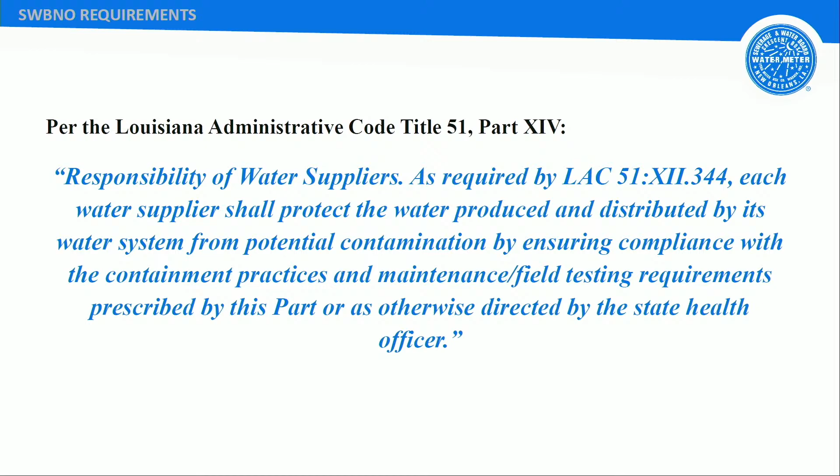So the first section of the proposed revisions will cover our definitions. There are 51 total definitions listed in this section, and a little over 30 of them are specific to cross-connection control. I wanted to clarify for you guys here, cross-connection control and backflow prevention are fairly synonymous for this presentation. Cross-connection is more of a symptom, meanwhile backflow prevention is the solution to that symptom. So if that's confusing in any way, let me know.

Any other terms that are not listed in this part shall exclusively be adapted from the International Plumbing Code, IPC 2021.

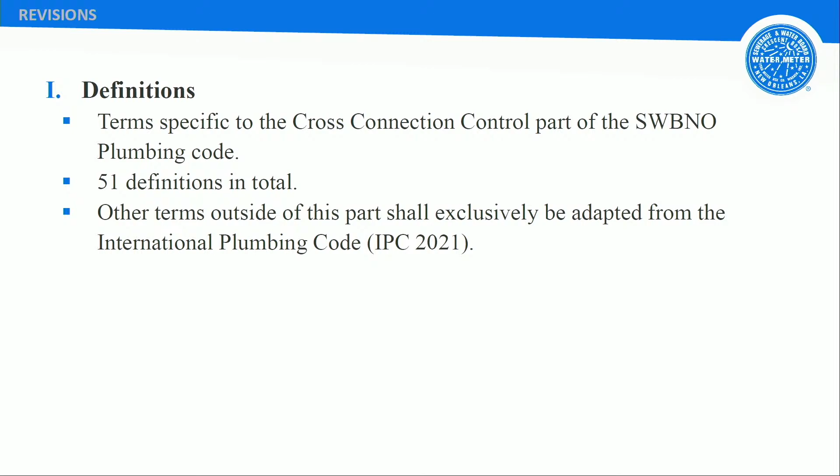In order to administer this program in an effective manner, the Sewage and Water Board will retain the right to implement specific processes for the purpose of due diligence. We, as the water purveyor, will require access to customers' properties to be able to survey for potential hazards. Any individual who wishes to perform work related to backflow prevention in our parish will need to go through an approved training program, and these training programs are approved by the State Plumbing Board of Louisiana, so that is something that they handle.

They will also need to register with the Sewage and Water Board's Plumbing Board, and they will need to register with the backflow section. And here is one of our more important bullet points: we will need the authorization to terminate water service if deemed necessary to protect the Sewage and Water Board's water supply from potential or actual cross-connection hazards.

This is a requirement that was outlined by the Louisiana Department of Health when we had our meeting with them, and it is also listed in that Louisiana Administrative Code. And for us that are new to this program, if you could define or explain in a little bit of detail cross-connection versus backflow prevention, those two concepts.

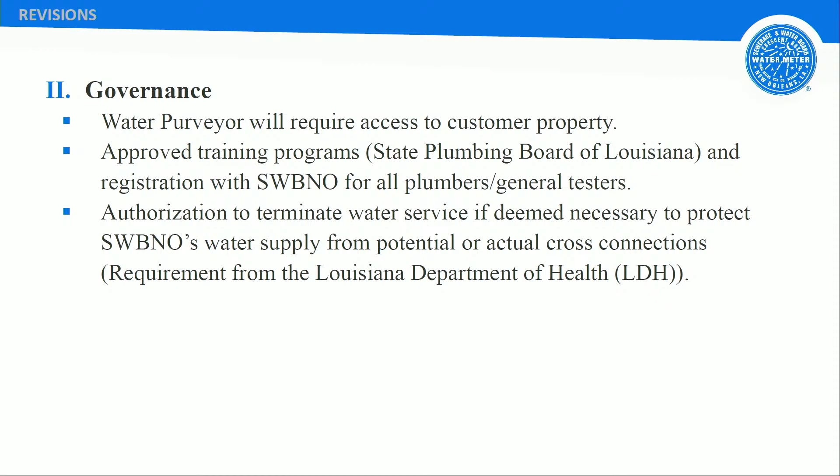Any questions on that? No, thank you. Thank you. All right. So, much like I said earlier, the authorization to terminate water service if we find a hazard that is dangerous enough to public health is vital for this program. We need to be able to protect ourselves and our constituents if we find something that's going to have a very, very negative effect on people's health.

So next, we're going to talk a little bit about responsibilities for all parties. We're going to start with the customer's responsibilities. The customer shall be responsible for the elimination and/or protection of all cross-connections on his premises.

So much like I spoke about a little earlier, what can those examples be? It can be an irrigation system with in-ground sprinklers for someone's lawn. It can be a pool that has an autofill device directly connected to the drinkable water supply. It can be a commercial building that has a fire system. It can also be a commercial or industrial building that does meat processing or any kind of chemical activities. There are quite a few different types of hazards that we need to be protecting against.

The customer shall, at the customer's own expense, cause installation, operation, repair, testing, and maintenance of backflow prevention assemblies as required by the administrative authority. The Sewage and Water Board is the administrative authority and the water purveyor, just to clarify.

This part, the customer's own expense, is also clearly outlined in the Louisiana Administrative Code. So this should not be anything that people have questions about because it's already in the state code, it's in our sanitary code. If you own the device, if you have a cross-connection on your premises, you own a device, take care of it. It is your responsibility to make sure that it works, to keep it up, or to install it if you have that cross-connection on your premises.

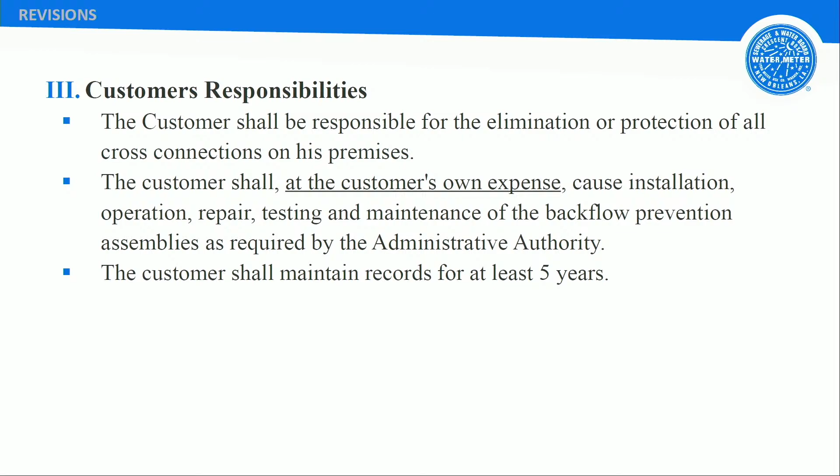How do people know about it? We send out letters, notices saying, hey, you have to have your assembly tested. It's been a year, you need to get your annual test together. Thank you.

Moving on to the plumber's responsibilities. As mentioned previously, to be authorized to do work in Orleans Parish, you need plumbers and general testers. A plumber is somebody that has either a master plumber license or a journeyman license. They are a professional within that branch. A general tester is somebody that has gone through a 40-hour general testing class, backflow testing class. They are only authorized to do testing. They cannot install, they cannot repair, they cannot do anything except test that assembly. So that's your difference there.

These plumbers and testers will need to register with the Sewage and Water Board's plumbing department, as well as the backflow section. So they will come down to the plumbing department and get their authorization to do work in Orleans Parish. And then they will usually send me an email and say, hey, I would like to start doing backflow testing or backflow work in Orleans Parish.

They have to get signed up with our software. With our software, they upload their state plumbing license, their WSPS, which is Water Supply Protection Specialist endorsement. If they're general testers, they will upload their backflow certification. All of those have due dates on them, and so we will put those in our system. The system keeps track of the due dates, and they will also upload their liability insurance. We keep track of that due date again. So if you are in my program and you are on the approved plumbers list, you are up to date on all of your credentials, you have your liability insurance, and you are authorized to do work in Orleans Parish.

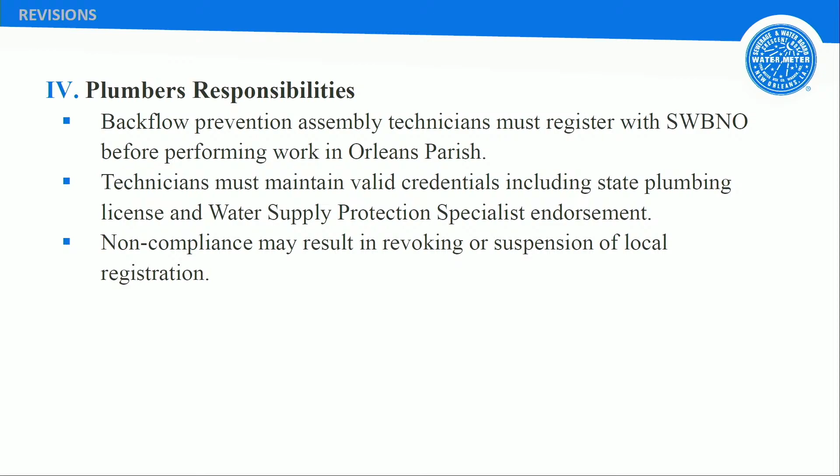Any questions or any of that? No? Okay. All right. Finally, what are our responsibilities as water purveyors and the administrative authority?

Well, we are tasked with surveying all of the existing premises, all 140,000+ water accounts, including the building plans or new buildings. So that's what we're currently doing. We are currently surveying mostly commercial buildings because that's where you have the greatest chance of having a cross connection. Most residential accounts will not have one unless they have an irrigation system or a pool.

And we will afterwards inform the customer of any corrective action that is deemed necessary. So if we come to a building, let's just say it's a hotel, and we find that they have an unprotected fire line, once I've concluded my survey of that area, the customer will receive a notice in the mail saying, you need to install this device on your fire line because it's a hazard.

On that notice, they will also be provided with a pathway on how to find the approved plumbers list, so that they can hire the plumber they need to address this hazard. We also maintain records of all cross-connection hazard surveys, the installation of any assemblies, the testing of any and all assemblies, and the repairs of all backflow prevention assemblies installed in the parish.

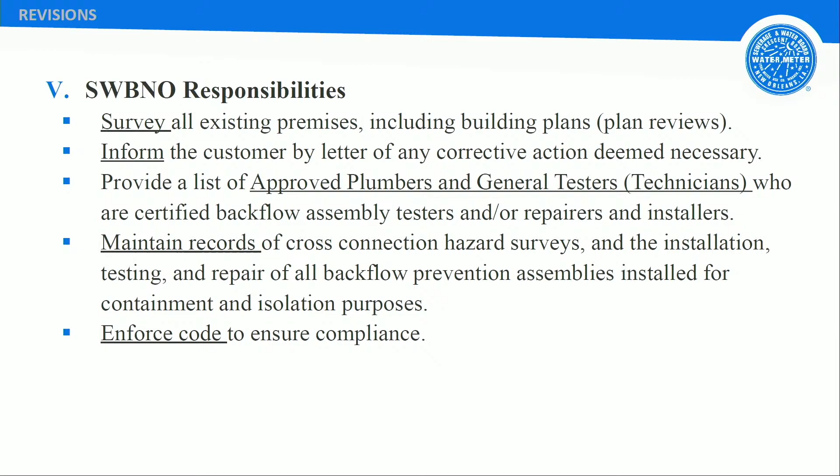So I wanted to go over some of the different backflow prevention assemblies. Once you start seeing these, you realize they're everywhere. Everywhere you go, you're like, alright, that's a backflow device, now I know what that is.

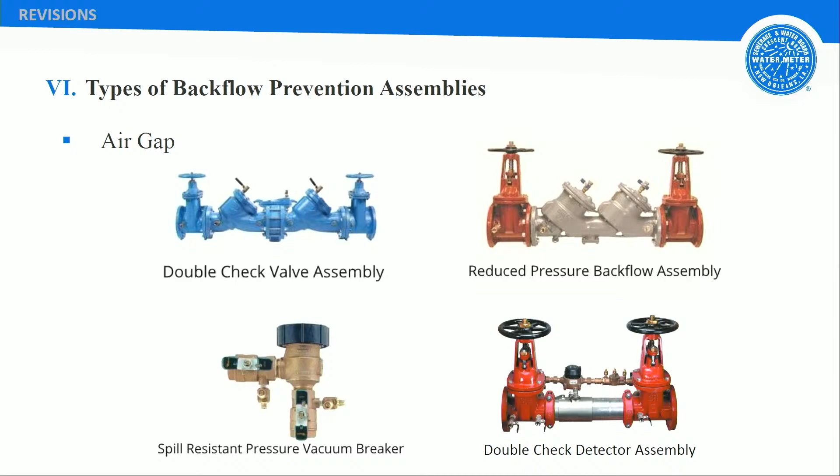Lastly, as we're coming to a close of this presentation, I wanted to go over the enforcement techniques we're trying to put in place. The customer's non-compliance may result in late fees or disruption of water service. This is very much a last resort for us.

Since we are still in our first year of having this program in-house, we have opted to educate our customers a lot this year. No one has received any late fees or disruption of water service based on non-compliance with this program. Instead, we have visited a lot of people, gone out and talked to them, and explained to them what the program means and what their responsibilities are as a customer.

And most of the non-compliance that we've been met with has not been malicious. It's been lack of knowledge.

But some of the non-compliance situations we might face is refusing water purveyor access to premises. This is already listed in the sanitary code, and the solution is for them to have a reduced pressure principle assembly installed for containment of that entire property. So you put it right by the meter, that way we know our water is protected against whatever you have on your side.

Failure to install required backflow protection, failure to submit an annual test report, or bypassing of a backflow prevention assembly or method which has been required by the administrative authority. We haven't had that many instances of anybody bypassing a backflow preventer, but it has happened.

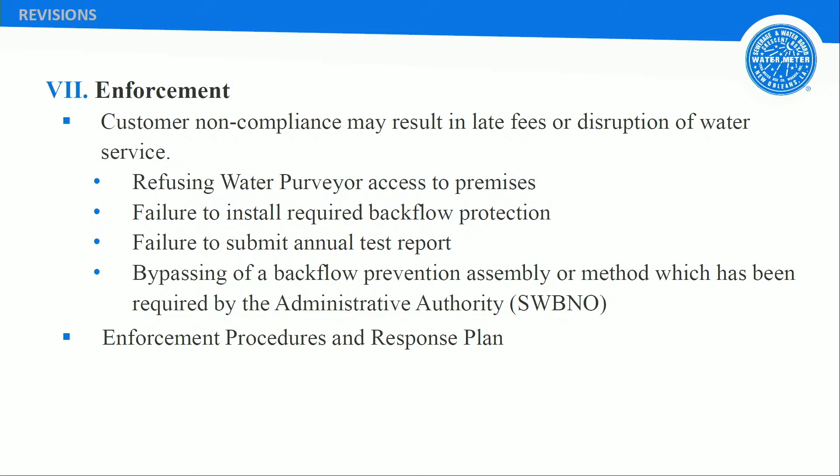But yeah, if anybody has any questions. Yeah, the annual test report—so I'm a customer, the tester comes to my property, tests my backflow device. Is it the tester who submits the information to the water board, or is it the customer?

So the process is as follows. If you get a letter saying your irrigation system needs to have its annual test done, you will go online onto the approved plumbers list, or you can call us and we'll send you that list. You will hire a tester or plumber to come out and do the test. The tester or plumber will apply for a permit to come and do the test, so I'm already aware this is about to happen. And once that's been approved, they will go out, do the test, and submit that test directly onto our website, so I can see basically every step of the way.

The customer also has access to this website, so they can see, okay, my plumber has submitted a permit application, or my plumber already uploaded my test. I can download a version of that test, or I can have the plumber send me the version of the test as well. Why do I have to keep it for 5 years if you have it?

That is what is written in the code, and for the code, most people—a lot of the municipalities are not using a wonderful program like we are. There are some that still use an Excel sheet to keep track of their backflow program. So per what's written in the code, it is required for you as a customer to keep track of it for 5 years.